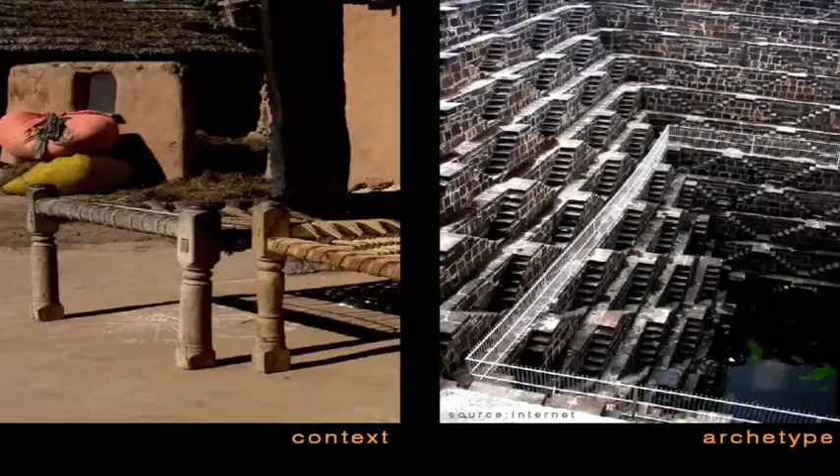Now let me start with the archetype. The archetype is a position - to make it simpler, it was generated by the Swiss psychologist C.G. Jung - it has to do with the collective unconsciousness. On the right side you see the step wells, captured in Gujarat. The step well is not only a place where water is drawn and pulled, but it is a place of ceremony. It is a kund that allows the community to come and exchange ideas, of political or non-political nature, but it also allows a single person to do his kriyas.

On the left side, we have context, full of prejudice. Most architects think that context is something that can be emulated quickly, instantly. If you build today in Delhi in the Rashtrapati Bhavan area - Lutyens' Delhi, as we call it - you think of yellow sandstone, Dholpur sandstone, or red Agra stone, and conclude that the building belongs to the context because it selected a material. Of course, that's not the case. The context is much larger. The context is a complete ecosystem.

The context is the people who are working, the people who are living in the buildings, who are making the buildings, and so on. The third thing we have concluded in our matrix is material and construction. We feel material and construction are a very essential part of the entire development of architecture because they give life to the building. It reflects the nature of the place, the context, and it also naturally challenges and expands the possibilities that new materials and skills are throwing at us.

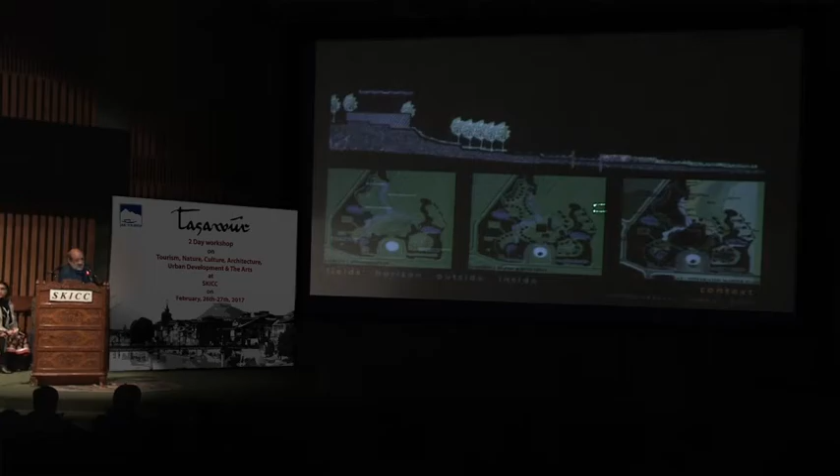As we move on, I think there is a very important exercise for all planners. We start with the afforestation program. The entire area, having a lot of water reserves created over a long period, becomes more humid, more soft, and can support gardens and agriculture. This is the USP for this project, because what will you get in Haryana? You don't have beautiful mountains to look at.

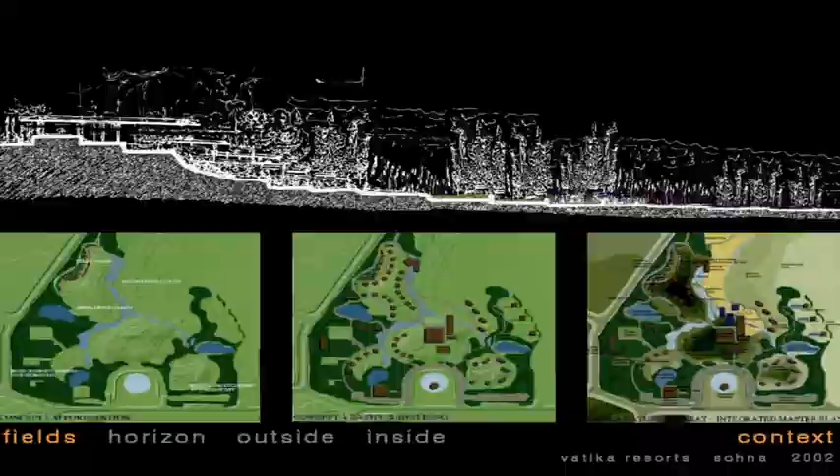There's not much, but you can create that if it is not there by sheer understanding of nature. In the middle you see the synthesis, or overlap, between the building and the forest. On the right side, finally, how we see the whole thing developing in future. Unfortunately the project didn't pick up fully, and we were moved out because the aesthetic governing the builder was not complying with our ideas.

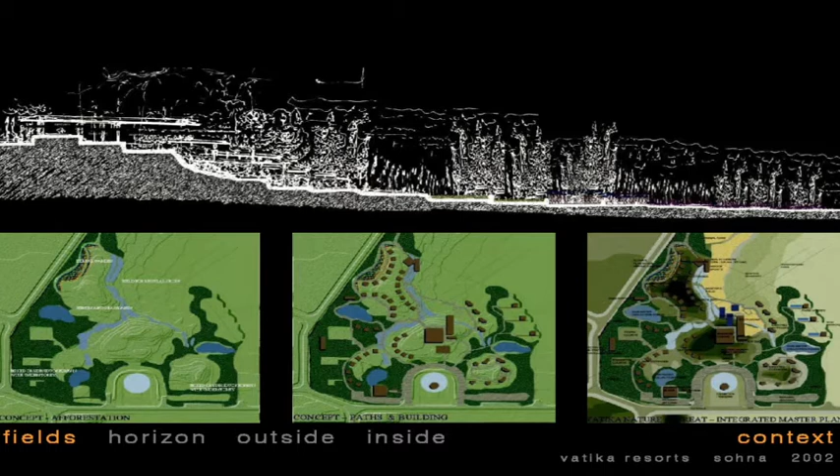Here you see some initial sketches of how we see the porosity that is possible within this arrangement between building and nature. The idea is not to make very heavy buildings—hence these little dots—to let the landscape flow through it. We'll see that in other pictures as well.

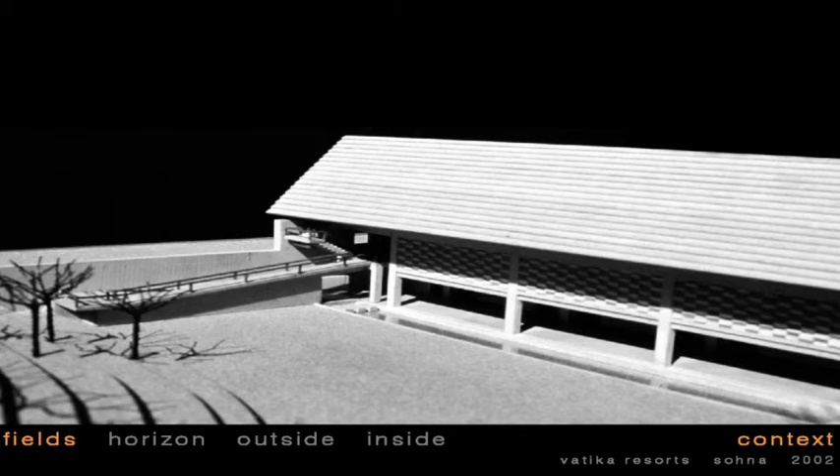Initial ideas on the building, taking clues from local materials. The roof was supposed—this is the convention center, a 3-story building—the roof was slate, then some screens against sun, and the lower part, relating to the garden, more porous. The roof landscape shows the lower wall in exposed concrete. The roof is very undulated, with a little glass box for seminar rooms.

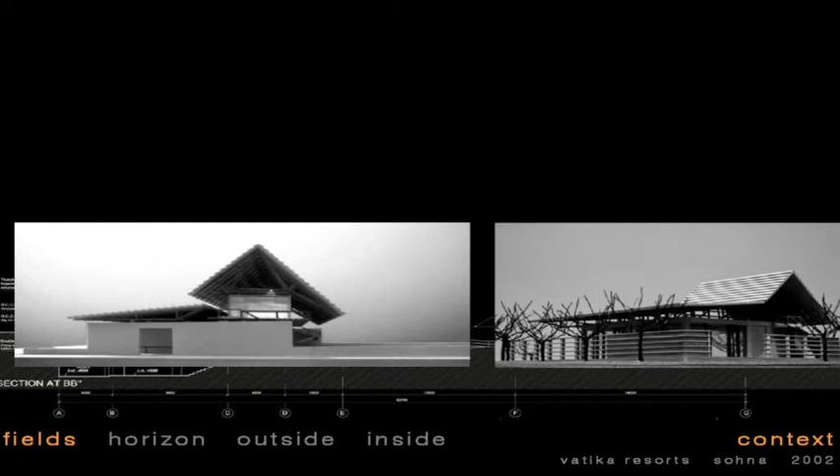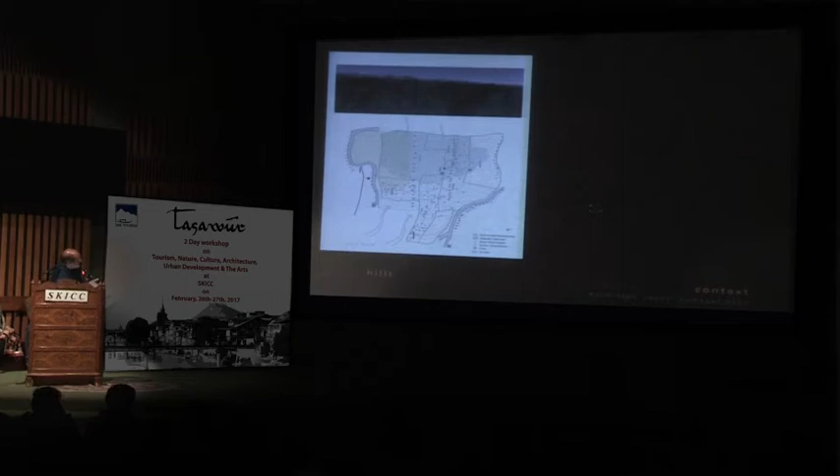The cottages, next. Now this is in Kashmir—some may have identified the place already. It's very important to survey how the sunlight is moving, because we live in a mountainous area, and if you want to enjoy sunbathing your entire space, you should track the sun, the winter winds, the summer winds, and also the existing flora and fauna, which this diagram shows.

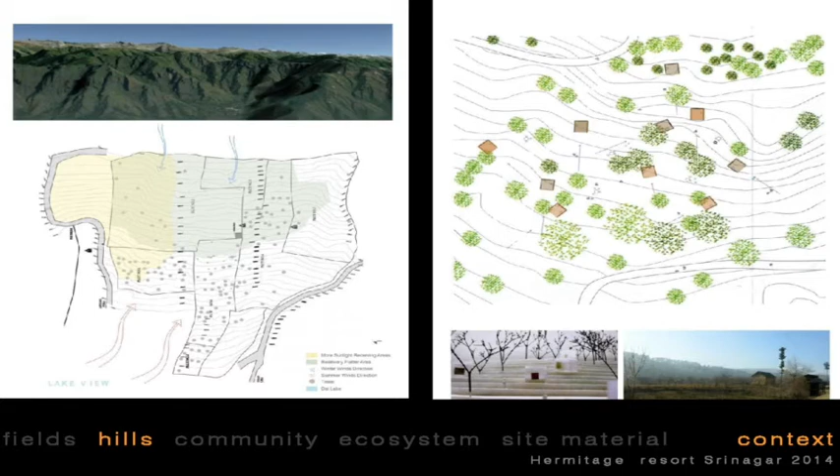One reaction could have been, and that's what we tried to pursue, to respect the existing plantation of cherry trees and go for a smaller building typology with very small buildings, keeping the porosity. In Shupian, one building on the way shows how generally in fields and mountains people build with individual, very small, two-story pavilion-like buildings. So we try to emulate that.

We also have the other morphology of houseboats that allow—and it's not everywhere in the world arranged this way—it's very peculiar to Srinagar that it leaves so much space in between, allowing nature to still become a player and a part of this man-made intervention. This inspired us a lot for the development of this resort.

Now to materials—material and construction is a very important subject for us. Kashmir has very good stone construction. We have very good stone masons. We have gabion wall systems that have been deployed for various slopes.

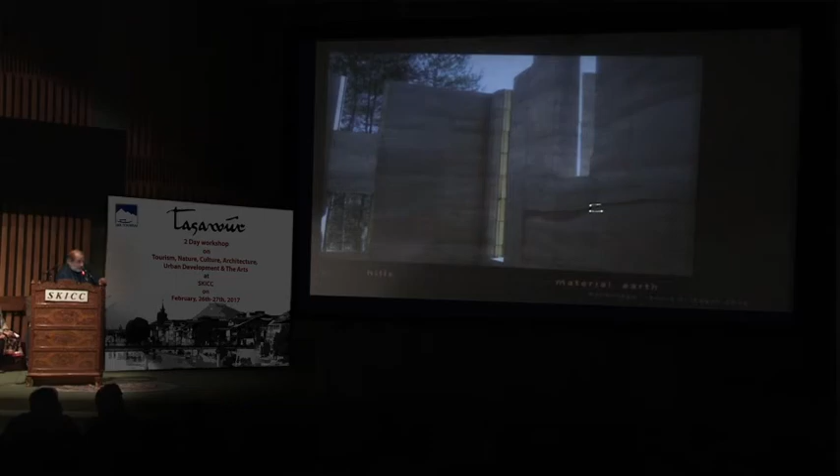Chitra had dwelled in good details, and I know her work. It's very fine. We have here material, earth as material, and we have, of course, our Kangri and the use of cane.

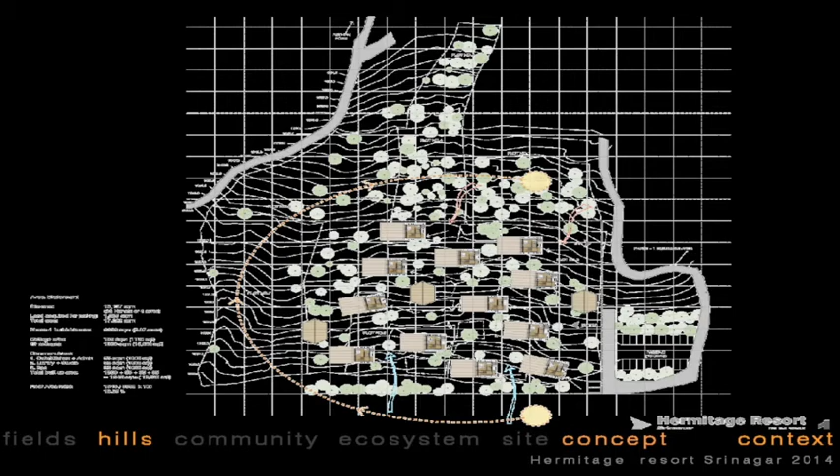Next picture, the use here, I think this is a Tumbaknari, if I'm not mistaken, and the use of clay for the entire culture. Now if I overlap all that I surveyed, we get this kind of master plan, which leaves enough space in between for the cherry trees to further continue living.

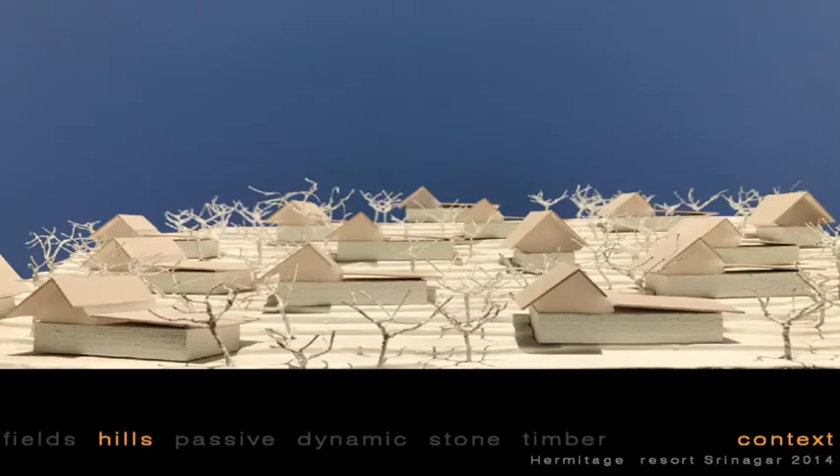A view from the lower levels, you have the arrangement of the building very carefully selected so that the view is not disturbed, because it's overlooking the western side. So western side would be the setting sun at Dal Lake. So as a tourist resort, it would be desirable to have it.

At the same time, certainly to harness the southern light, we tried to do the 3D renders, because the project is not picking up, 3D renders of how we see it. So the prototype we tried to build within 3 months, doing the timber construction in such a fine way that it was quick, understandable by the carpenters.

I must say, Kashmiri carpenters are exceptionally skilled and exceptionally care for detailing, care for joinery.

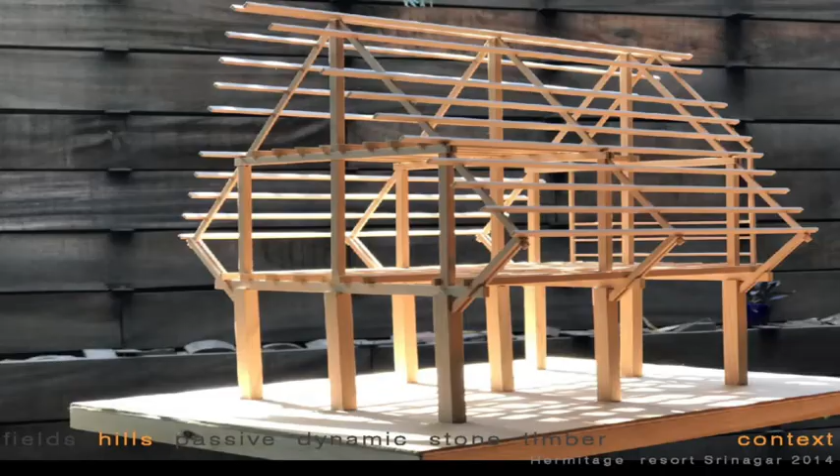The model, we work a lot with large models, joinery models, to explain to our construction people, because the drawings are not always very readable. They don't understand very often the language. The drawing as a language is still very inhibiting to people and the communication, so a model is always better.

This was one unit that was built, and except for the waterproofing which came from Delhi, everything is local wood from the market.

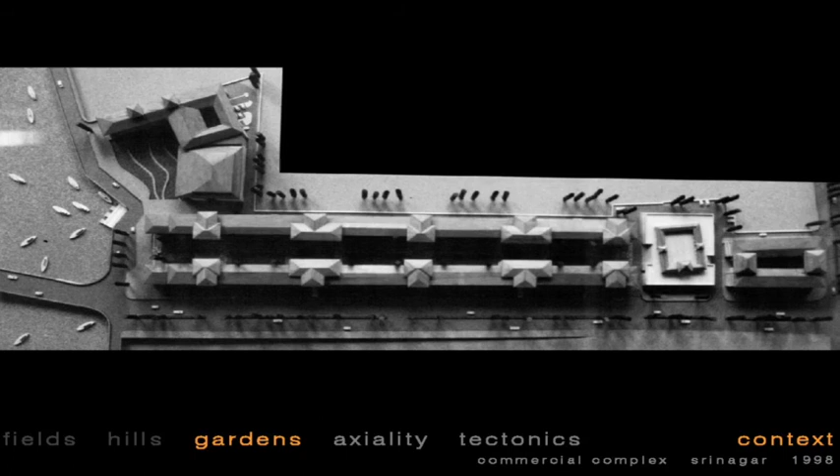This I will do very fast. It was a competition in Srinagar. SDA had launched it, so it's building in the garden, so I will let go of this very fast. It is showing the quality that we are seeing.

Now, another building that we recently completed in Satkol, that's ahead of Bhimtal in Uttarakhand, which tried to explore the possibility of large span. This challenge was only possible by using certain techniques of gluing the timber in a particular way.

Now, very important in this placemaking was that we don't build on the face where the Pakdandi or the entrance to the property is. We convinced the client, who had already started earlier with a civil engineer to build this. We don't build it right there so that it's convenient for him, but push the building down the hill and explore the hill as a part of your arrival area.

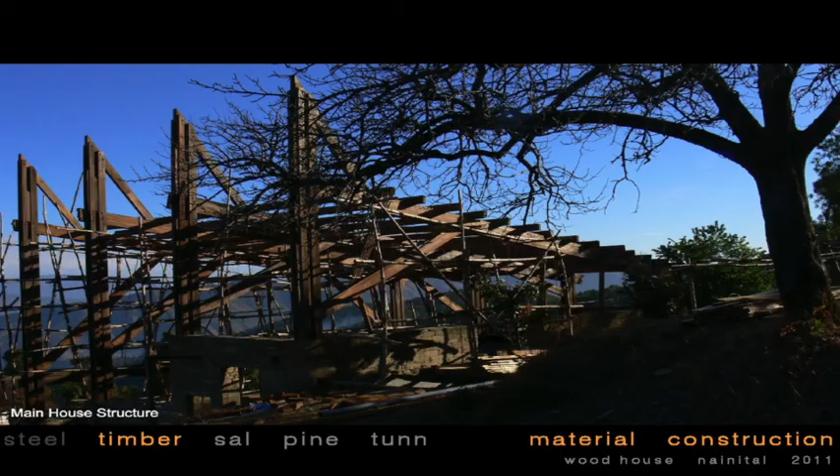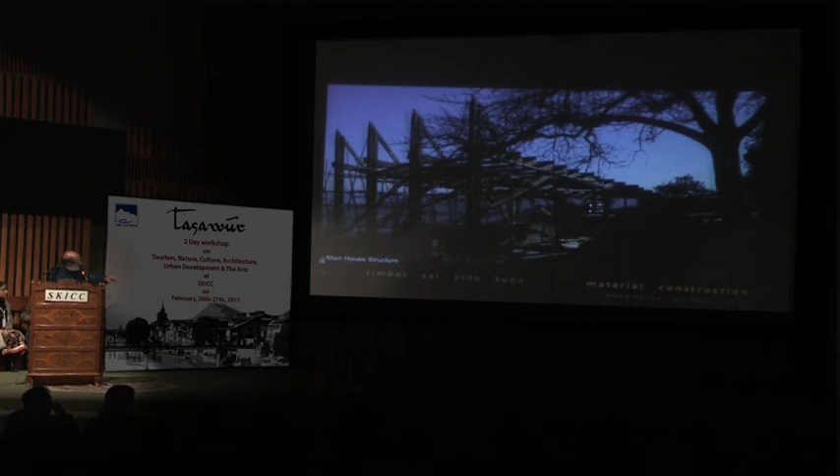Some detail how the construction is made. It may be reminiscent of the bridge construction in Srinagar. So we have used 3 different timbers: the sal for the construction, very hard; the pine for the interiors; the tunn, which is a red cedar, for the external cladding.

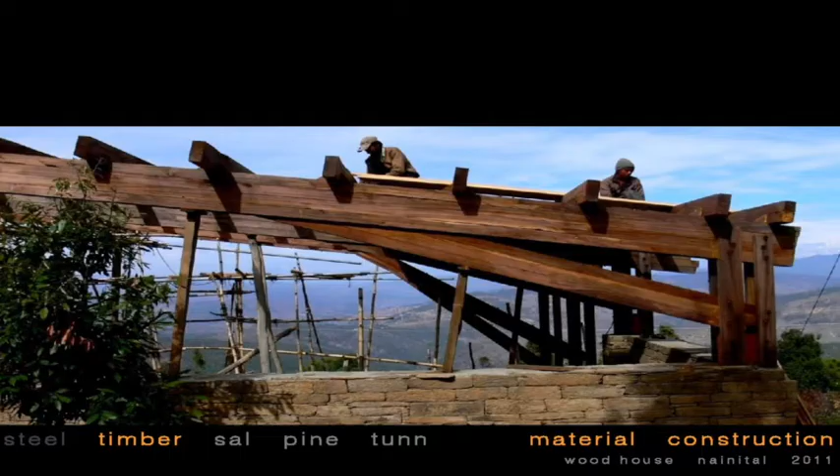We had a very bad team to work with, and challenges that come with a bad team. But what is interesting is people are ready to help you out. People are ready to understand, and they enjoy challenges very often. So all these beams are about 1.5 feet, about 450mm, made out of 3 planks glued together, spanning this large construction.

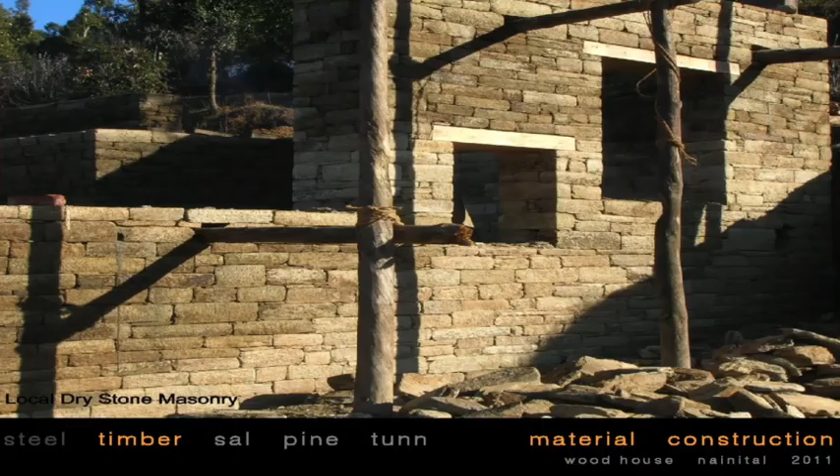The stone was locally used. We have carefully tried to do a drywall arrangement, because mortar on the surfaces kills the beauty of a stone. So you would like to see it more of stone than of mortar. I know what PWD does in this country - they see finally no stone and they call it stonework or random rubble work, RRB or something like that.